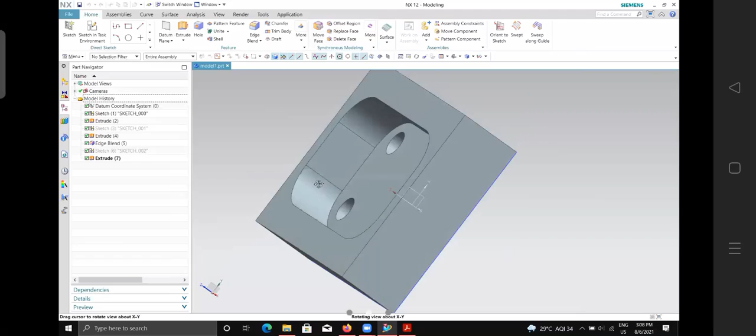So this is basically a rectangle, and I have made a slot onto it. Removed some material, and I placed 4 holes inside it.

The dimensions for this, if you want to see, I have given as 200 and 150. 200 is the length of the rectangle, 150 is the width. Then for the slot, I have given it as 100 and 175. The length is 175 and the width is 100.

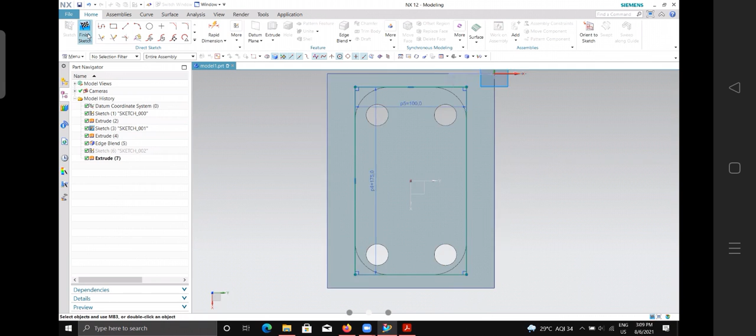Then for the holes, all holes have a diameter of 20. So these are the dimensions.

If you are able to, you can create it afterwards, or if you want, you can create it with me and do it now. Okay sir, now I will. So if you are able to create, you can create it now and we can do it side by side. Okay, now I will do it. I am doing now.

Are you creating it now? Yes sir. What? I didn't hear you. Yes sir, I am creating now. Okay, fine.

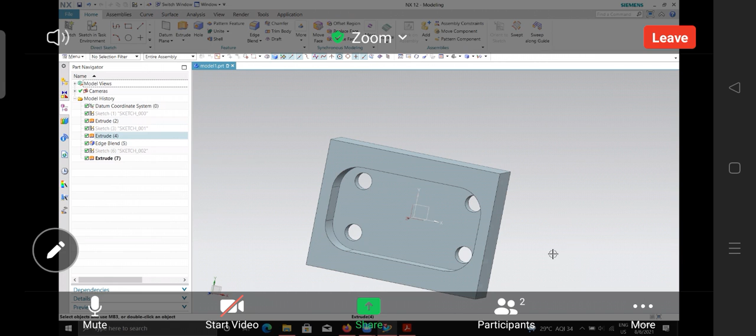So first start with the rectangle. Then the extrude height for this rectangle I have given as 50, 50 height. And inside I have cut the material to 35. And the holes have been cut through.

So today we will be starting with the first operation called face milling. So we'll see how we can do certain operations using face milling.

So tell me when you have finished completing the model. Okay, oh okay sir.

Okay, so next what we'll do is we'll come into the file tab, then select new, and select general set, and click OK.

Now you need to save the model also. Just save the model before doing this. Okay, okay.

Now once we come into here, my main aim is to create the desired model into this shape, and we need to see the manufacturing process for this.

So first, what I will do is I need to remove the material on top, then remove the material inside the slot, and then remove the material inside these 4 holes. So that is the main thing. So we will be starting with a block of rectangle, then we will be milling it to the required form. That is our aim.

Are you able to hear me? Yes sir, I'm hearing.

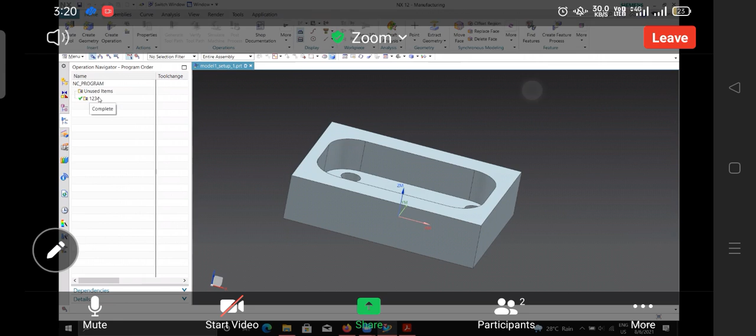Okay, now first, what I will do is, if you want, you can change the name of the program order. So this will be the default name that will come in. If you want to change, you can just select it, right click it, and rename it if you want.

I just give some random name. Then after that, the first thing we need to do is define the workpiece. Okay, just hold, I'll just come. One thing to note.

So first thing what we'll do is I'll go into the geometry view. Double click on this MCS mill and bring it to the top here. So you know the height of this particular model, right? That is 50. Yes sir.

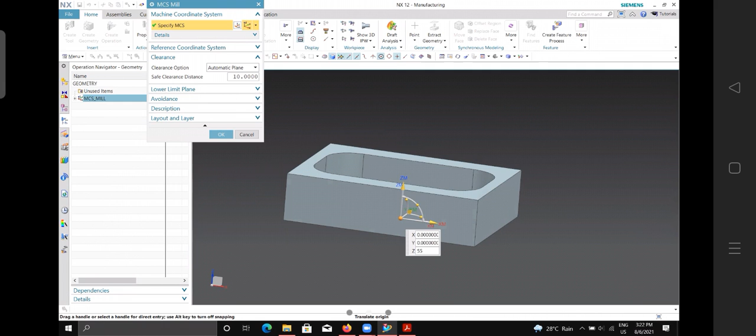I had given it as 50, so I'll give the Z direction as 55. I'm not giving 50 itself. That is because I want an extra bit of material on the top. So I'll give 55 now.

Click OK. Now you will see that there is a bit of distance here, right? Yes sir, of 5 mm extra distance. So we'll compensate that. So next what we'll do is we'll expand this MCS mill.

Double click on the workpiece, and specify the part and blank. So click on specify part, select the part. And we need to specify the blank.

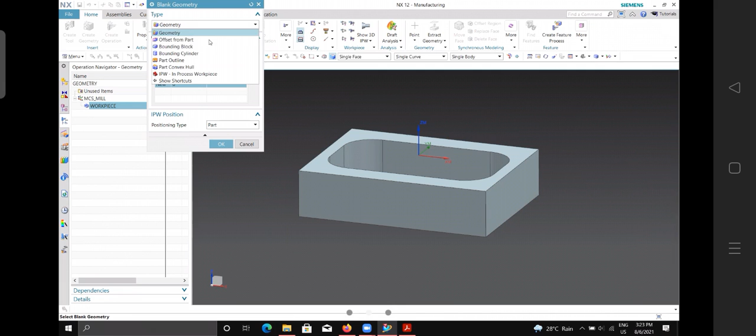Select the blank, and the blank that I'm going to give is, since it is in the shape of a rectangle, I'll be selecting bounding block. Okay, so select bounding block.

And also one thing to note is, since I have given the MCS mill an extra distance or clearance of 5 mm, I'm going to give in the positive Z direction an extra stock of 5 mm. Okay, so give it here.

That is in the positive Z direction. I can see in all directions X, Y, Z. Yeah, I can see here in the limits. You need to give it in the positive Z direction, so it will come to the base of this coordinate system.

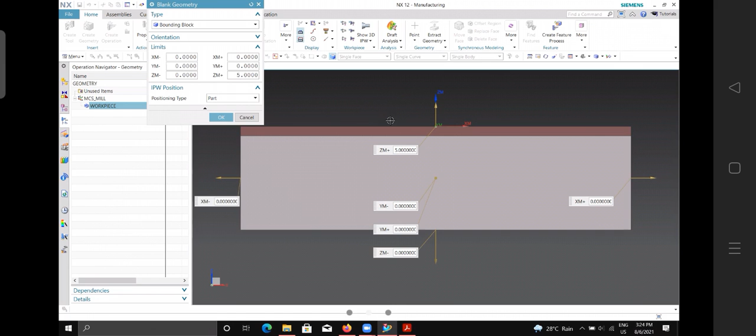So just give the value 5. Then click OK. Now the blank has been defined.

Now, since we do not have any check geometry, no need to define that. Then I'll just change the material of the workpiece. I'll change that to, let's say, aluminium. Then click OK. Now the workpiece has been defined.

Now the next thing we need to do is define the tools, or create the tools. So I'll be creating, let's say, 2 types of tools. Click on create tool.

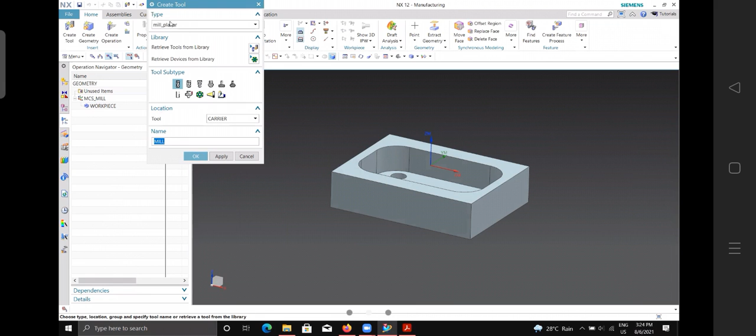The type, we'll leave it as mill planar. Select the tool subtype. The tools we'll be using here will be the end mill type. Because why I'm using end mill is its end is a flat edge. Yes, flat end.

So here we do not have any fillets. Fillets will be on the sides. So in that case, if we had any fillets on the ground or something like that on the sides here, we should have gone for a ball mill or something like that. But since we have pointed corners or edges, no need to go for that. We can select this mill, end mill.

Select that, and the tool location will be in pocket one. Select pocket one. Now give the name. I'll give it as end mill underscore.

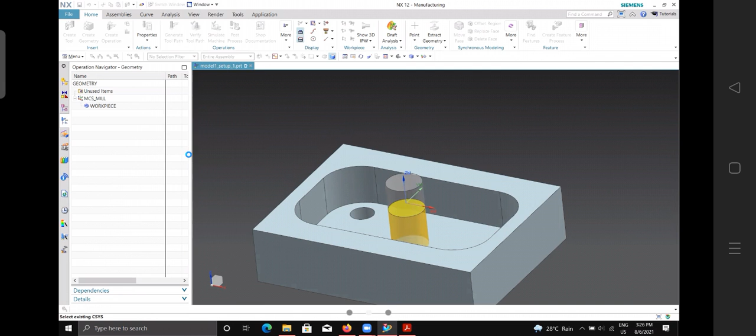It's a diameter of, since we are going for face milling, we need to mill the top face here. So for that instance, I am going for the diameter of 30. So D30. Click OK. Now you will see the tool.

Now we require a larger tool here because we are going to face the top one. We are going for face milling of the top face. So that is why, in order to remove a large amount of material, I am going to give a larger tool. So here I am only concerned with the diameter. No need to give any other or change any other values.

You can see the material of the tool is HSS, high speed steel. If you want, you can change the material also here. From here, you can go for carbide, carbide coated, or HSS steel, anything like that. Now the only thing to note is the hardness value should be greater than the workpiece. That is why I selected aluminium. High speed steel has a much higher hardness value than aluminium. That is why I selected HSS as my tool and aluminium as my workpiece.

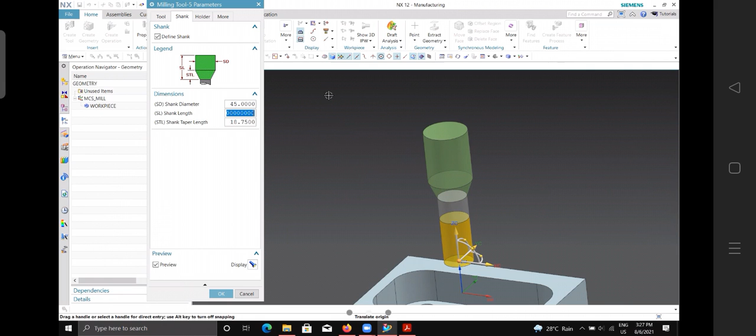Next, we need to provide the shank and holder. So select shank, define the shank. Then I'll provide the holder. Let me just adjust the shank length. 5. And the holder.

Now, if you know the values here, you can give the values. Since I do not know the values, I will be retrieving a holder from the library. So select library, select retrieve holder from library. Select what type of class selection we are going for. We are going for a milling drilling holder. Select that, click OK, then click OK again, and you will get the library.

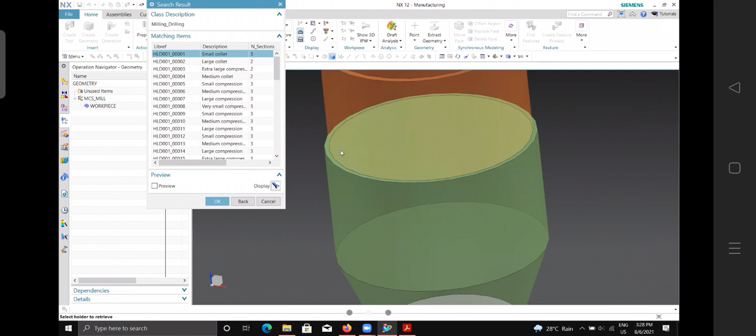Select any type, just check. So we check a smaller one, if you select a smaller collet, you will see that it is not correctly fitting with it. If you select a larger collet, you will see this correctly fits with the shank. So you can select that. So we'll select that.

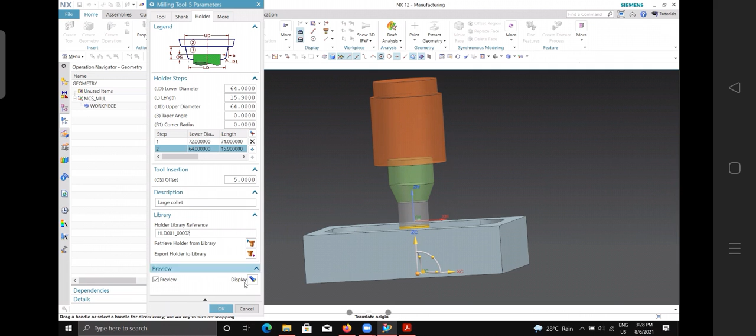I might as well give an offset of, let's say, 5. So the shank will be inside the holder, and click OK. So these are the required things we need to give. Click OK. Now the tool has been defined.

Now we will go for the first operation. So come into create operation. Now we are going for the type called mill planar. In the other case, in yesterday's class, I went for the mill contour type. That is for another operation.

So here, since we are dealing with planar surfaces, we'll be going with planar mill. Select mill planar as your type, and we will see the first operation, that is called floor and wall. There are different operations here: floor and wall with IPW, face milling with boundaries, face milling manual, like that. We'll go through all this, but we'll be discussing the important ones.

So first I'll be selecting floor and wall. Floor and walls are the most easiest type of cutting operations, in which you need to show the floors that you are going to cut, the basement or the planar part that you are going to cut. So select that. Start with the first operation, floor and wall.

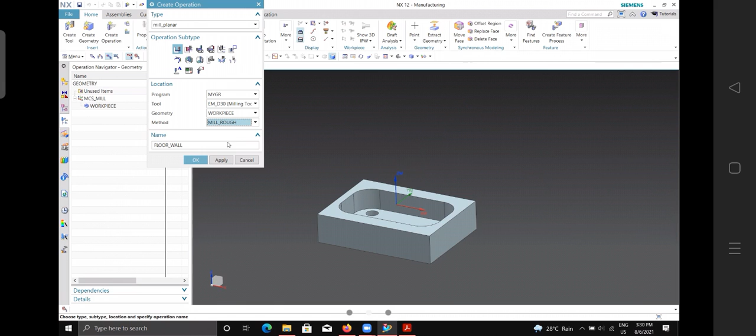Then select the program. Program has already been defined. Then the tool, we need to select the tool. Currently it's given as none. Select our tool. We need to select the geometry. Geometry is not MCS mill, it is the workpiece. So select workpiece and the method. Select the method as rough. So select mill rough. Now click OK.

Now our part has already been defined. If you click on this display, it will show you that the part is already defined. Now the main thing we need to define here is the cut area floor. This is the main thing to define. We do not have a check body since it is not clamped onto any bench vise or any type of clamping fixture, so no need to give that check body.

We need to define the cut area floor. The wall geometry is not needed in this case, but in the later cases we require it. So in this particular circumstance, we will require the cut area floor. The cut area floor shows the area or the plane up to which we need to cut. So specify the cut area floor. Click on this cut area floor.

Click on the symbol to specify the cut area floor. Click on that and select the face. That is this face; up to this face we need to cut. So select that face and click OK. Now that face has been selected. Let's see. You click on this, it will show you the cut area floor. So this is the cut area floor. Clear up to this?

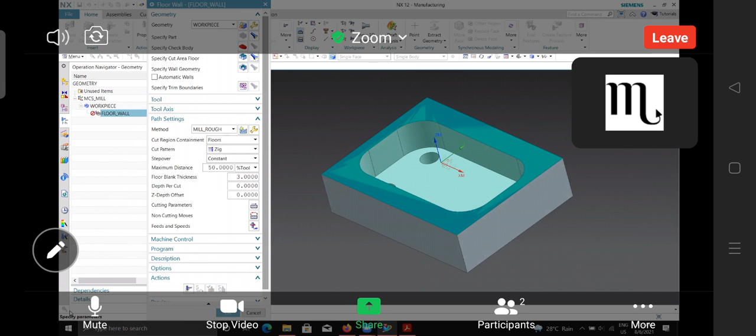Once again, I will share my screen. Hello. Hello.

It is the workpiece, so we have selected the cut area. Could you zoom in to the operations there? First, you need to define the part. Specify the part first. The part has not been defined. Did you define it with the other one? Sorry, sir. Okay, now it is defined, I think. One thing, just close this operation tab. Close it and then again open create operation. Planar, floor and wall. Okay, and click OK.

It's not showing that the workpiece is defined for some reason. Could you close this and let me check the geometry view? Could you double click on the workpiece option there? Now the part and blank are not defined. Initially I defined it. You need to define the blank also. Bounding block, and give thickness. Okay, then select. Yeah, that is all fine.

Okay, now the part is defined. When it is defined, it will show that particular torch symbol, so it is already defined. Now select that face and click OK. So I was telling you up to that, right? Yes, sir. I selected the whole face; this pocket is also selected. What? Only the top face selected, or the pocket also selected? Only the top face is selected.

Now if you want to see the top face, just click on that torch symbol. Can you see? This one, on the specify cut floor option. Just click on it and you will see. This is the floor area that it's going to cut. Clear? Yes, sir.

Now, after defining that, come to the bottom settings here. You will see path settings. The method is already defined, that is mill rough. Now we need to see the cut region containment, cut pattern, step over. If you place your mouse over it, you will see the cut region containment. That is the floor, so it is contained to the floors. You can also select walls, and it will move towards the walls if there are any walls. But in our case there are no walls outside here, only the floor. So just select the floor.

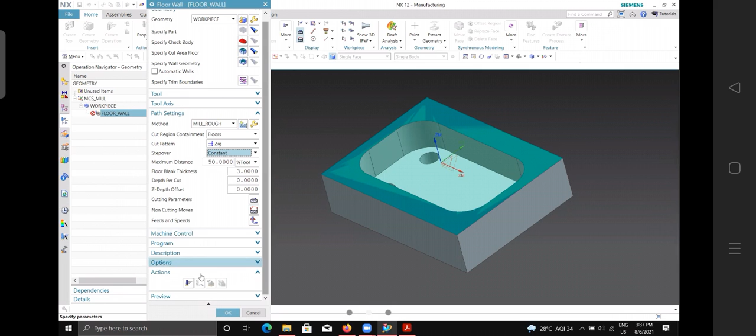No need to give walls. Then you can see the cut pattern. I'll come to cut pattern once we have generated it. Then there is one more thing called step over, which we will see when I generate the cut pattern. I'm not going to change any of the other options here, just going to generate it. At the bottom part here you see actions, and there you click on the generate button. This button.

And if you click on that, you will see the cut pattern. So can you see? Yes, sir. This is the cut pattern you can see. So the cut pattern signifies different colors, right? Yes, sir. Here you can see the red color, the blue color, the yellow color, like that. Yes. Now, in order to understand what these colors signify, I'll tell you each one.

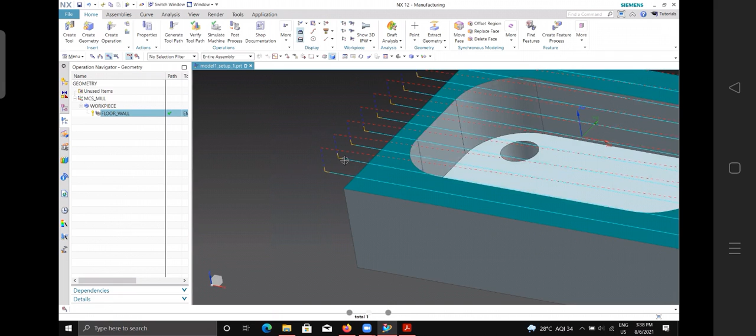So the thing that you see here, that is the cyan color lines, or the light blue color lines, are the cutting movement. Okay. So the cutting movement of the tool is denoted by this cyan color. And the yellow color is denoting the engaging and disengaging.

So it will be moving to the zero position, then moving towards the cutting move. So it is not effectively the engaging or disengagement, but it will come to an initial position, then move into the cutting move. After that, it will be coming back to this position, that is at the end. You can see at the end. So at the end, it will be coming back here, and then again moving axially, and moving to the next direction.

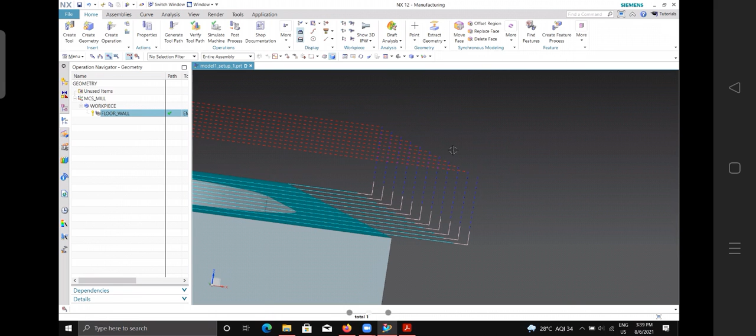So this blue color line is called the engagement. This blue dotted line is called the engagement line, and the red color line is called the disengagement line. So that is how we define this. Are you clear? Okay, sir. So the cyan color line is the cutting movement, and the yellow color is basically for positioning the tool. Blue color line is for engagement, and red color line is for disengagement.

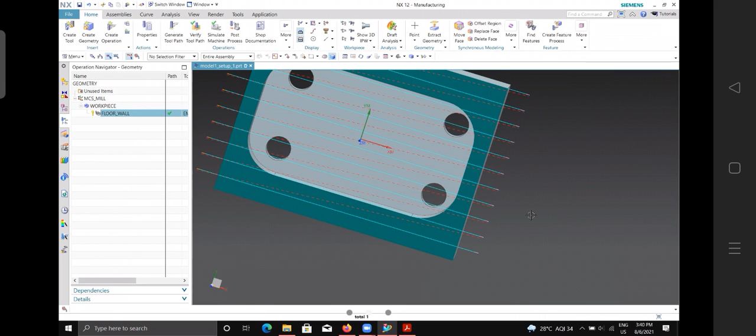So you will see the pattern here. So if you see how it cuts, the tool will be starting from here. So it will come down axially and cut it from here to here. Then it will move up axially. And you can see through the dotted line, it will be moving to the second line. Then again doing the same operation and repeating it again and again. Are you clear up to this?

Yes, sir. So this is how the cutting pattern works. Now this type of cutting pattern is called the zig cutting pattern. Are you clear? Yes, sir. This is called the zig cutting pattern. Now we'll be discussing different types of cutting pattern, but when it comes to zig, this is the cutting pattern that it follows.

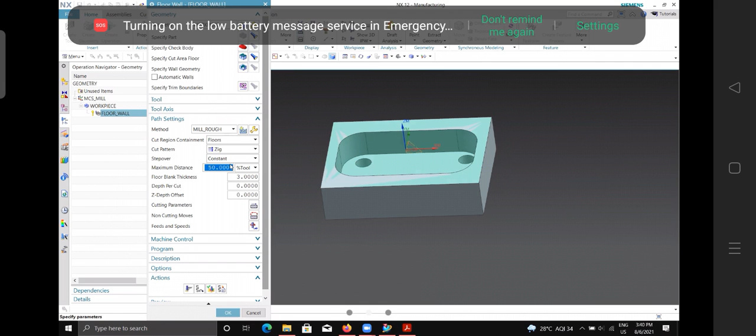So that 50% means the basic area that will be engaged with the part. So when it is cutting the part, it will be engaging 50% of the tool. That is what is meant by maximum distance. Now let's say I increase it to 75% and again generate this. We'll see that the number of cutting patterns will be reduced.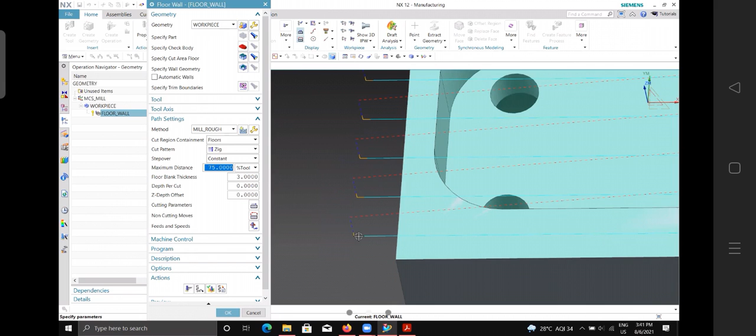So what step over essentially means is the distance between one cutting line or cutting move to the other cutting move. So the step over distance is this horizontal distance. Can you see? Yes, sir. So this is the distance of step over. So if you are increasing the step over, let's say to 100, and again generating this, you will see that the number of cutting lines have been reduced, right? Yes, sir.

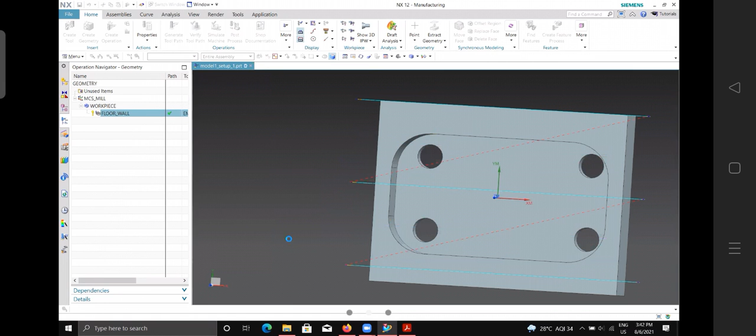Clear? Yes, sir. Okay. And if I increase it to 150 or let's say 250, it will reduce it again. So I can see only 3 cutting lines. Now what we'll do is we'll just verify this to see how it cuts. So at the bottom here you can click on verify. In actions, next to generate, you will see verify. Click on verify. Then click on 3D dynamic.

Then if you want to see the tool displaying the dotted lines, you can select that. You can select the tool display as wireframe like this. You can use it as a point, so it will show it as a point. You can use it as an axis, or the normal tool or the assembly.

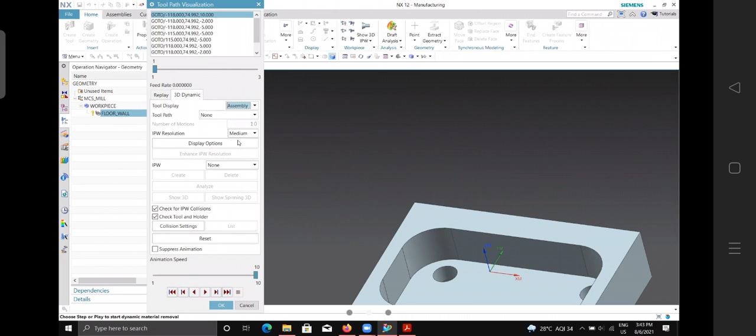Now let's use it as a tool itself, and if you want to see the tool path, the cutting tool path, you can turn it on. Just click on all and it will turn it on. Then, okay. Now we'll just see the value here.

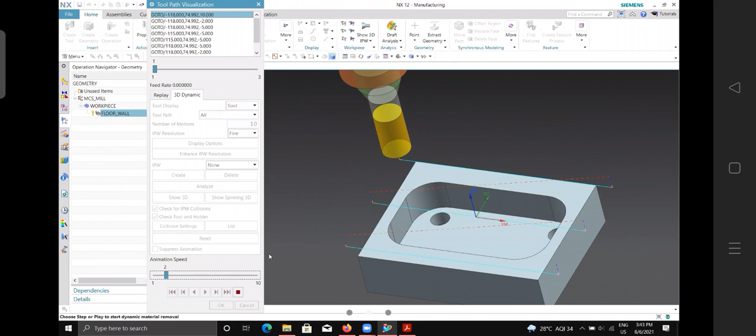Just reduce the animation speed, then click on play. Now we'll see how it is cutting this. So can you see? Yes, sir. So the first cutting pattern has been completed. Now the tool will move along this direction, that is the red dotted line, and it will cut from here to here. Then again it will move up, then cut to the end. Okay.

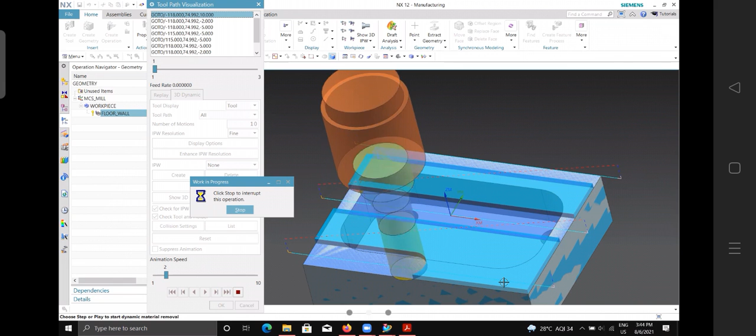So this is the process. So can you say what is the problem here? Step over is more, sir, at 250%. Yeah, since step over is very large, the number of cutting patterns is not compensating to remove the extra material that is being left behind. You can see here. Yes, sir. So this amount of material is being left behind, right? Yes. These parts.

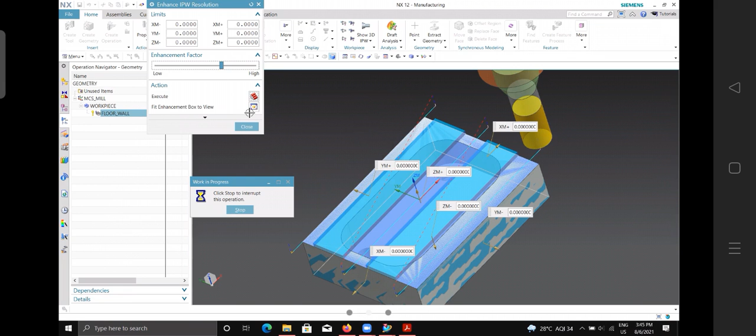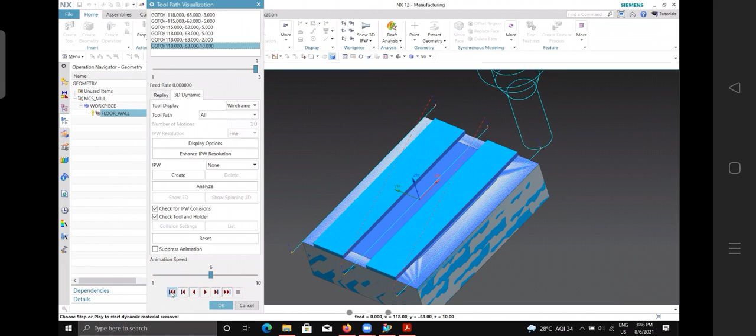And just reduce the transparency and everything. Okay, so basically you can see how it is being done. So this has been left over. So what can we do to compensate it? We need to reduce the distance, right? Yes, sir.

So I'll reduce the maximum distance here from 250 to, let's say, 50 is enough. Because when you are giving 50, it will automatically compensate the total face. So again click on verify, then again do it. Now I am going to change the tool display to either point or wireframe, because if you change it to wireframe or point, the system processing will be much smoother. Otherwise it will take some time for the system to select all this. That's why.

So change the tool display to wireframe and click play. Now you will see how it is cutting it. So now it is properly cutting it, right? So this is what is meant by the step over value. So you can adjust it for yourself and see what is the difference. Okay, sir. Now currently the step over is given as constant.

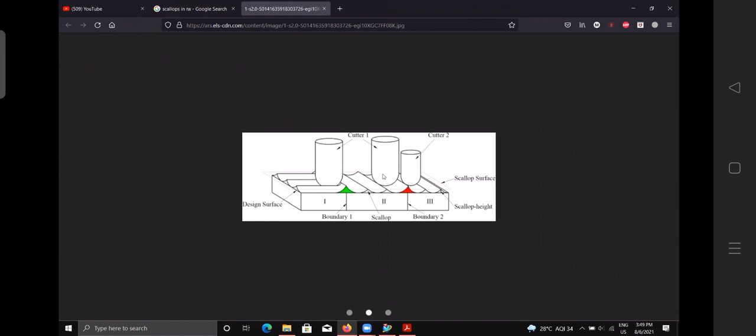So this is the image. Here you can see this is a flat surface, and when the tool is cutting it like this, you will see that the scallop is created like this, right? It's like a wave. Okay, sir. So the scallop measurement is based on the amount of surface that you cut, how fine you are finishing the material. So if you increase the scallop height, it will bring certain indentations like this. We don't want this; we want a fine surface, not a surface like this. So in order to avoid that, we need to reduce the scallop height.

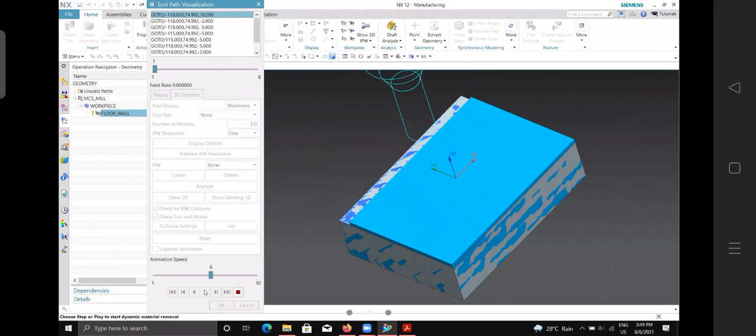So here the scallop height is given as 0.01. That is very less. Now if we increase it to, let's say, 5, we'll generate this and see if we see any scallops. Now in this case you won't see any scallop. That is because we are using an end mill. Now if I increase the scallop height to, let's say, 25, I'll just change the tool. You can change the tool whenever you want. So here we are using an end mill, right?

Yes. So if you want to change the tool, you have an option called the tool tab here after geometry. If you expand the tool tab, you will see the tool given here. If you want to edit the same tool, you can click on edit, come here and change the tool parameters if you want. So this is basically an end mill, so it won't give you any different types of scallops. In order to give a scallop, you need to increase the lower radius.

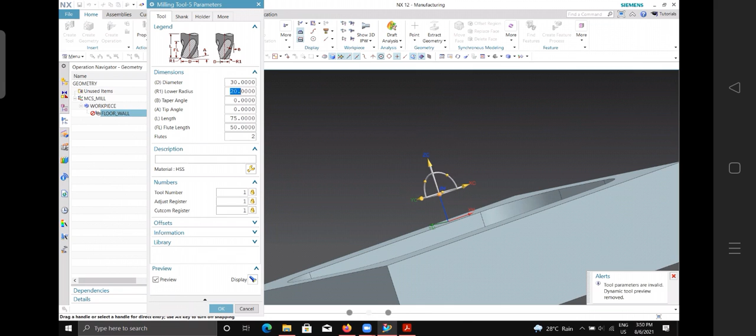Say I'll increase the lower radius to 20, 10. Okay, now you can see it will have a curvature like this of 50. So we'll change it to this. And the scallop height is given as 25. I'll again increase it to, let's say, 50, and we'll see if there is any difference. And press on play, and we'll see the difference.

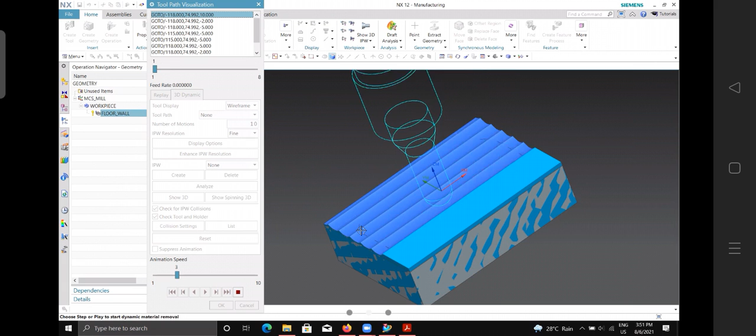So can you see the difference here? Yes, sir. So this is the surface that you will get. And these kinds of structures are called scallops, like a waveform, right? So this is something that you will get when you are using a ball mill, like this. But when you are using an end mill, you won't get it like that. That is why we prefer end mills when milling planar surfaces. Okay, sir.

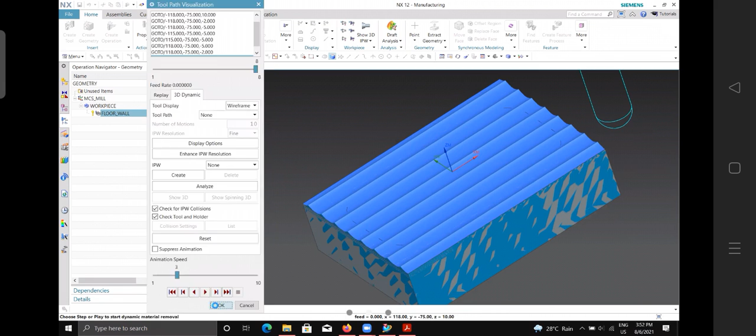So I am going to again change the tool. So come into the tool tab again. The tool is already defined here. Just click on this for edit and display. And I'll again reduce the lower radius to 0. Okay, so that is known as scallop. Then percentage of tool flatness is the same thing as that of the constant size.

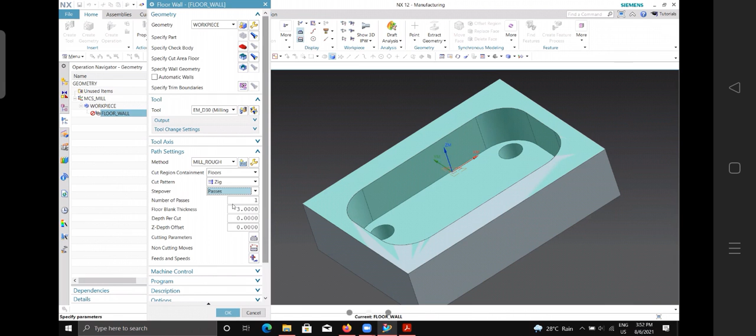Then the passes. Passes is something that you can definitely define here. Currently the passes is given as 1. Now, if you just generate this or verify this, you will see that the cutting will be like this because it only has a single pass. And if you increase the pass to, let's say, 4 and generate it, you will get the 4 passes. So I can define it this way also.

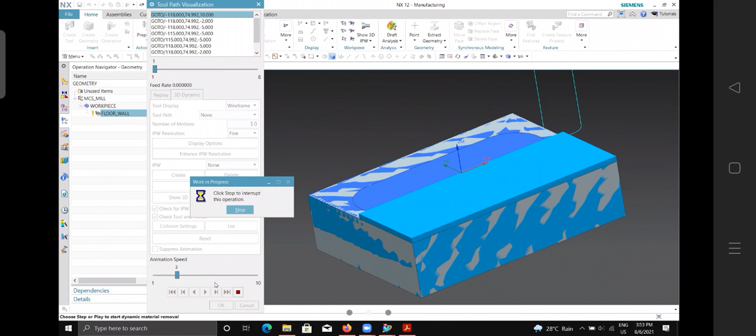Now, if you want to increase it to, let's say, 10, or I would say the ideal one will be 8. 8 is the ideal one so that it cuts all the material. Okay, sir.

So these are the different ways in which you can define it. So we can give passes. Then variable average is also something that we can give, but you need to know the maximum and minimum distance in order to give that. And exact is also the same thing as that of the constant and percentage of tool flatness. You can give any of the parameters if you know this. Otherwise, go for constant or passes or tool flatness.

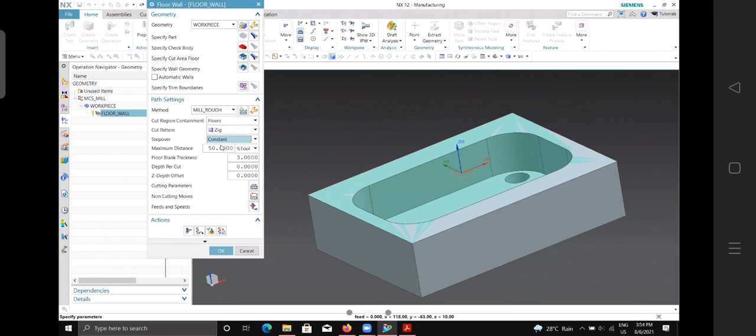Now, we'll come to the cut pattern. The cut pattern we were using here was the zig pattern. From the name itself, you know. So, it is starting from one place, coming to the other, then moving on to the same position, then again cutting, moving to the same position, again cutting. So, that is called zig. Now there is one more type of cutting pattern called zigzag.

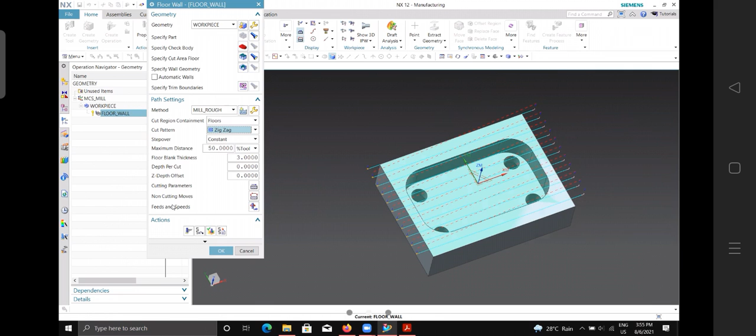So what zigzag does is basically goes around and around. You're familiar with the zigzag shape, right? Yeah. Like a Z. So that is the way in which it cuts. So we select zigzag and click on generate. You will get a pattern like this. You see, this is the zigzag pattern. I'll just generate the cutting pattern. We'll see.

So what this effectively does is that it reduces the tool engaging and disengaging, so it can cut in a single pass. Clear? Okay, sir. So when you're creating a workpiece, you need to cut it efficiently, right? Yes, sir. So when you're using the zig pattern, it is not entirely efficient because the tool is always engaging and disengaging, right? Yes, sir. So by doing that, the machining time will be increased.

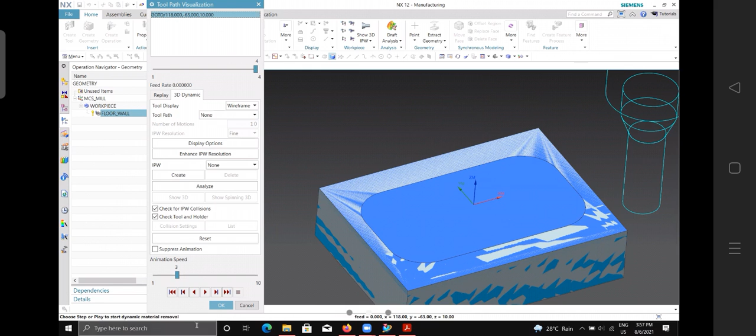But when you are using a zigzag or any other type of cutting pattern, it will cut it in a single pass. The only thing is that the depth should be considered here. When you are cutting it to a higher depth, there might be some chances that the tool might break off because of that shearing stress. So in order to avoid that, you need to view the depth of cut, in which depth I can cut. If you are clear with those parameters, then you can cut it using the zigzag pattern.

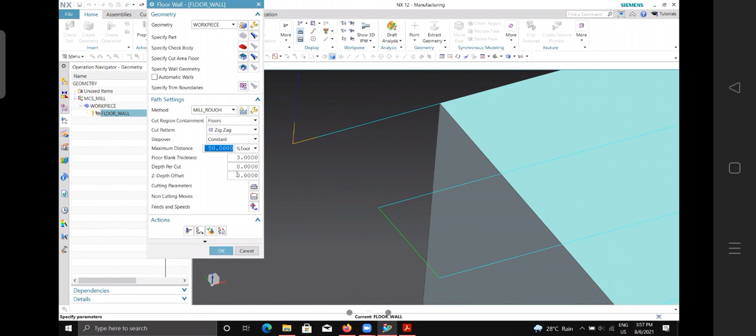Now, how I know that it is cutting in a single pass is that if you look closely here, it is having a single cut pattern, right? Yes, sir. And it is not having any levels. In the other case also it doesn't have any levels. It was just cutting as it goes, right? Right, sir. That is because we have not provided any depth of cut. Now, if you are providing a depth of cut, it will cut it accordingly. We will come to that. But zigzag, you understand the cut pattern zigzag, right? Yes, sir.

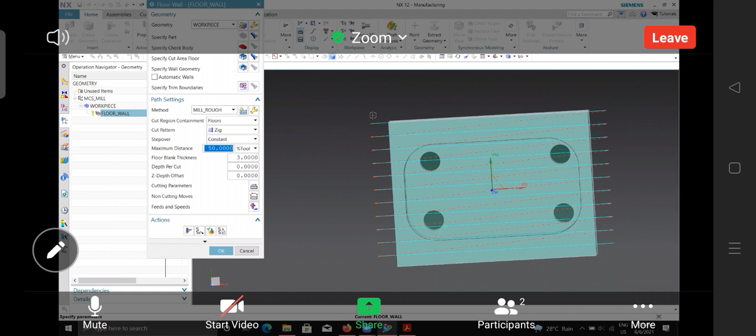Okay. Now I'll change it to, let's say, zig with contour, and we'll generate this again. So zig with contour is a different thing. It's sort of similar to zig, but the only thing it is taking into consideration is that the contour is confined. When you were considering zig only and generated it, the cutting pattern was going outside the workpiece, right? So when you are cutting with zig with contour, it is confined to the rectangle or the workpiece here. That is the advantage of this.

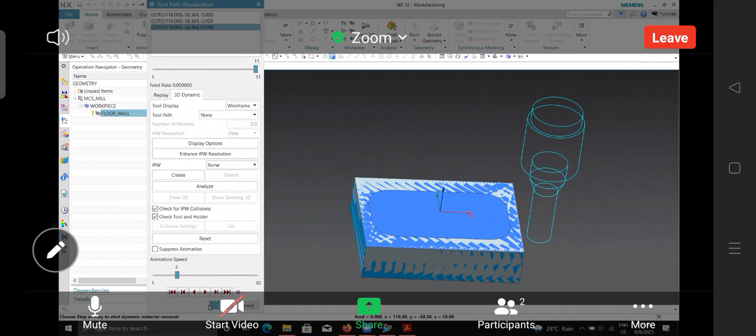Now if you verify this type of cutting, we'll see. So you can see how it is cutting it. Now this has a lot of engagement and disengagement, right? Yes, sir. It is going up and down like that, similar to zig. Okay, sir. So this is also not an efficient method.

Now next we'll go into the other cut pattern. That is the first option here, which is called follow part. So select follow part, click on generate, and this is the follow part method. So the tool will be engaging from the middle portion and it will be cutting towards the outside. Okay, so the tool will be engaging from here, moving towards this direction, starting from the center. So it will cut in this direction. Can you see? From here, like that.

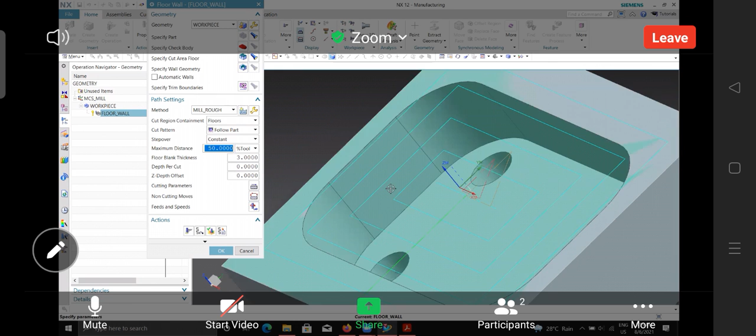Now we'll see the cut pattern. On verify, on play. You can see. So it will start cutting around the sides and will come to the center and again disengage. So this is also one efficient way to cut, since it is cutting with a single pass. So this is the follow part method. Clear with this follow part? Yes, sir.

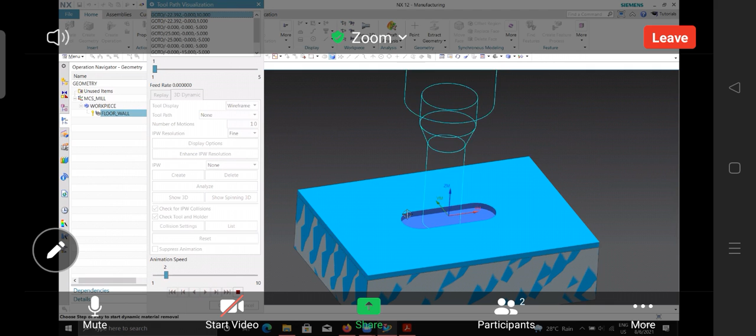Now another cut pattern is follow periphery. If we select that, it is kind of the same as the follow part method. You will not find a difference here, but the only thing is that it will be starting from the center instead of starting from the end. So it will start from the center and go towards the boundaries. That is how it cuts. So it is relatively opposite to the follow part option. Follow part, the tool path is also the same, right?

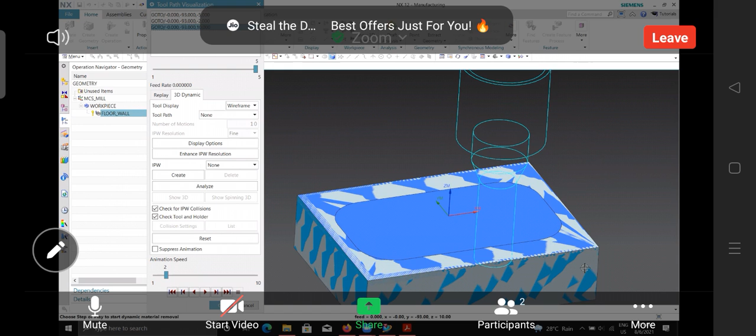Yeah, the tool path is same, but the only thing is that with follow part, it will be starting from the boundary and going towards the center. But in the case of follow periphery, it will be cutting from the center to the boundaries. That is the only difference. The movement of the tool will be entirely opposite.

And there is one more type of cutting pattern that is called profile. Now, if you select profile and generate this, again, in this particular case, I cannot do the profile one. I'll show you in another one. Okay, sir. Because profile and trochoidal are a special type of cutting.

Now, if you go for trochoidal, the difference I'll show you. The trochoidal pattern is basically used for cutting cavities, meaning inside a particular workpiece. The main example is the slot. If you want to cut the slot, you can use this particular type of cutting pattern. Now, how it cuts, I'll show you.

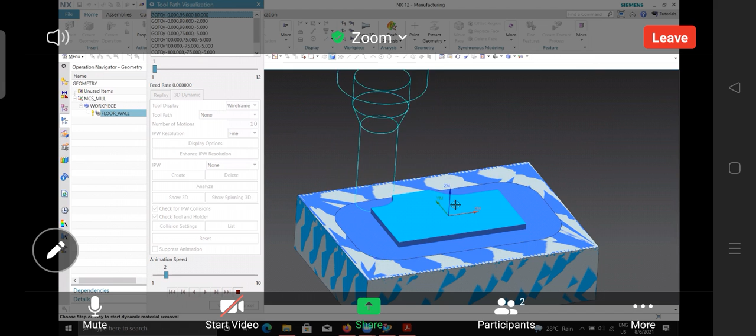So it will cut from the ends, like in the case of periphery, but its movements will be quite different. But in this case, you won't find the difference between trochoidal and follow periphery because there is a special case involved. The pattern is not quite shown here. So in another case, I'll show you the trochoidal pattern.

So these are the cutting patterns available. You can use any type, but the efficient methods are follow part, follow periphery, trochoidal, and zigzag. So I'll go for zigzag for now. And you need to define this one, that is the floor blank thickness.

So here there are three options: floor blank thickness, depth per cut, and depth offset. The floor blank thickness is the thickness that I have provided on this particular job piece. I had already given a thickness of 5 mm, so that is the distance you should write here for the floor blank, because we want to reduce it to a distance of 5, to get the original face. That is why I am giving the floor blank thickness as 5.

Then you need to provide the depth of cut, or depth per cut. When we are generating this, you will only see a single level for cutting the whole workpiece. Now if you give the depth of cut as 1 and click generate, you will see almost 1, 2, 3, 4, 5 levels. For 5, it will be cutting a single mm through each pass, or each level. So understand what is depth per cut.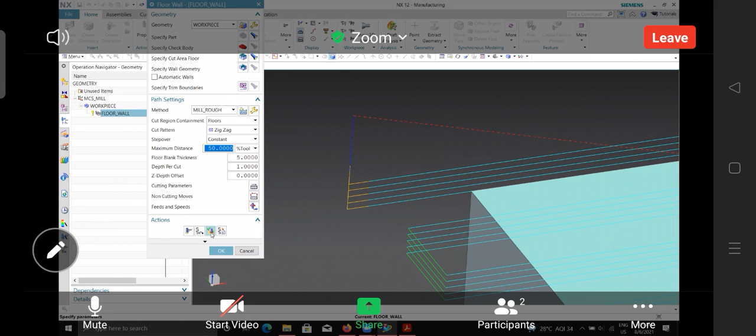Now I'll just verify this and show it to you. So it will be cutting the whole material 5 times. Let me play this so you can see. It will remove the 1 mm layer first. Once it has removed the top layer, it will again start from the end and remove the second layer. It will do this for 5 times, repeating it 5 times.

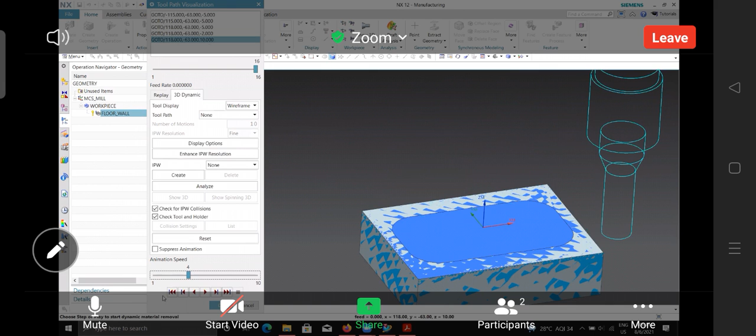This is how you can maintain the life of the tool and also reduce the wear of the tool. If you are cutting it in a single blow, there are chances for the tool to break off or rupture. That is why we are giving the depth of cut.

And the Z-depth offset, currently we do not require this one, so no need to give it for now. So these are the operations involved in this.

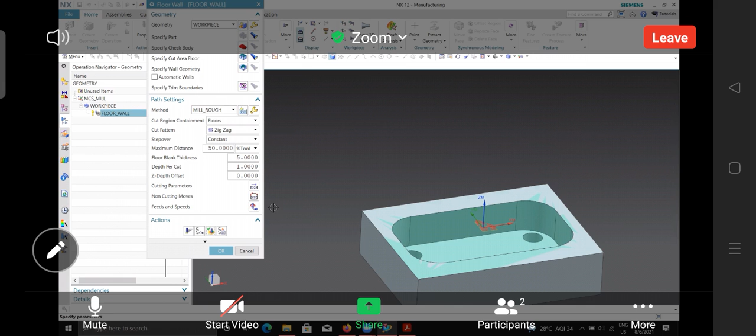Now one more thing we can see in the other options here is cutting parameters, non-cutting moves, and feed and speed. I'll tell you about feed and speed. If you select feed and speed, you are basically defining the feed of the tool. We can define the surface speed, feed per tooth, and spindle speed. I'm going to give the spindle speed as up to 3000 RPM. Once you give the speed, it will automatically calculate the surface speed and feed per tooth. So either you give the surface speed, feed per tooth, or spindle speed, and when you click on the symbol, it will automatically calculate the other values based on the given value. That is how you can give it, that is feed and speed.

Then next thing is the cutting parameters. For feed and speed, we entered only the spindle speed in RPM. Once you enter the spindle speed, you can click on the symbol to calculate the surface speed and feed per tooth automatically, the software will calculate it, no need to give it.

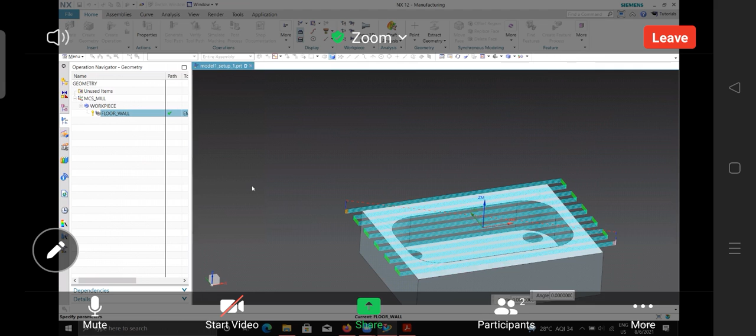After that you will see the cutting parameters. If you click on this, it will show different options: strategy, stock, corners, connections, containment, and more. These are the different options you will see, but in our case I will not be covering all of them because we'll be coming into other operations and utilize all these options later. Cutting parameters is right about here, next across to cutting parameters, you will see this symbol, just click on that and it will open up the cutting parameters. What cutting parameters does is provide options related to the cutting of the workpiece, different options that you can change in order to cut the object at a particular angle or something like that.

Now when you select cutting parameters, you will see an option called strategy. Under the strategy tab you can define the cut direction. There are two types of cut direction: climb cut, where the tool goes against the workpiece and rotates in the anti-clockwise direction, and conventional cut, where the tool goes against the workpiece and cuts it in the other direction.

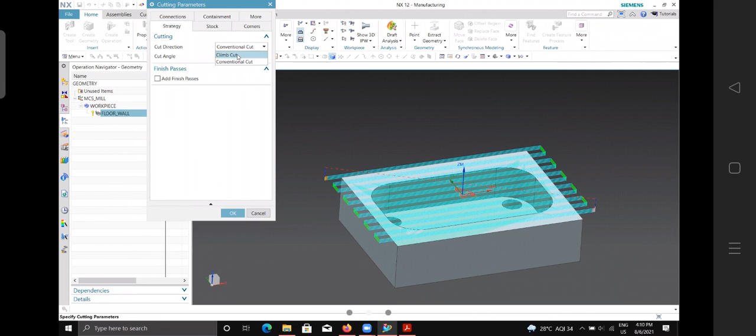Sir, you can cut it in either way if you want. Then there is the cut angle. Cut angle is given currently as automatic. Now if you want to specify a cut angle, you can specify the cut angle.

Let's say the angle is from the x coordinate, that is this coordinate. Now if you want to change the angle to 45 degrees, it will change according to that. The cut angle will change like this, and the tool will come accordingly. So it is the cut angle from the x direction.

So this is the x direction. It will be tilting towards this. Now we'll just see—if you generate it, you can see the cut direction. Can you see how the direction changed?

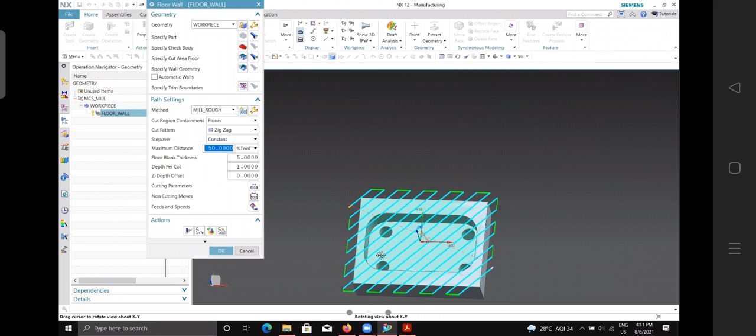If you click on verify, you will see how it cuts. So it will cut the workpiece in this way. Clear? Yes, sir.

So that is what the cutting parameters does. This is just an option inside cutting parameters. We can give it in this form. Now I am going for automatic itself, so it will automatically recognize that.

And there are different other options here. You can give the stock. Stock is for giving the extra material left behind—that is the stock, part stock. That you can give; we'll be coming onto all that in other classes.

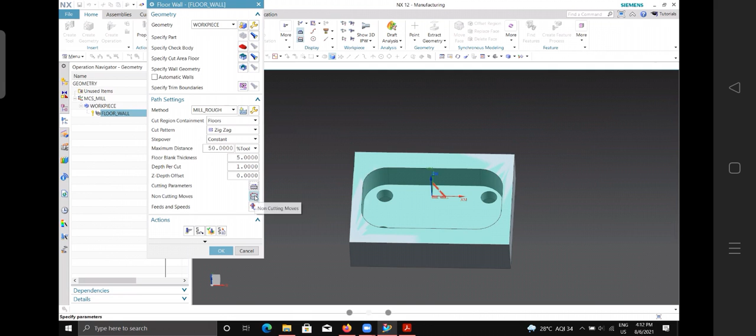So that is about cutting parameters. Then there is the non-cutting moves, that is the non-cutting parameters. You can select that option by clicking here. It's just below the cutting parameters—just click on that.

Now this deals with the engagement and disengagement of the tool—how the tool should engage and how it should disengage. It will give the disengage type, the ramp angle and everything. So how the tool should approach it, either in helical form—you can give the diameter for the helical form, the tool dia, then the ramp angle, how it should approach the workpiece, then the height.

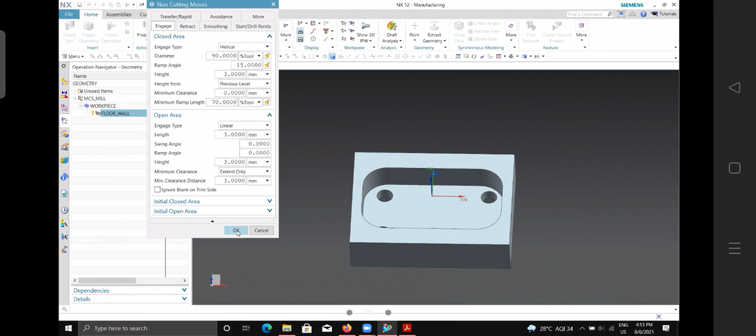The tool cutting direction—all these things can be defined here. And also the same in the case of retracting, then when cutting smooth corners, drilling. So these are the different options, but we'll come to all this—it is not required by us in this case.

So we have generated this. Now you will see this is just the programming for the current operation. I can see the programming here—this is the system language. Click OK, now our first operation has been defined. Floor and wall, clear? Now we need to move on to the second operation, that is cutting the slot inside.

So for that we need to create another tool. First I'll use the same tool for cutting the slot inside here, and after that we will use a smaller tool, an end mill of a smaller size. I'll select the create tool option. The tool location will be pocket 2 and I'll name this EM underscore D12, giving a diameter of 12.

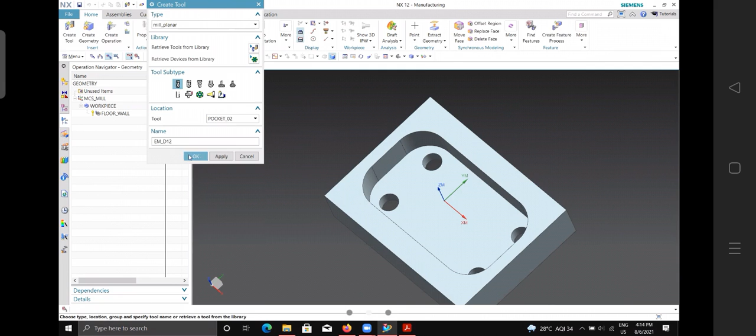This will be the finishing tool, so give its diameter as 12. You can define the shank—I'll give the shank diameter as 25. Length we will reduce to 45, and provide a holder for it from the library. You can retrieve the holder from the library.

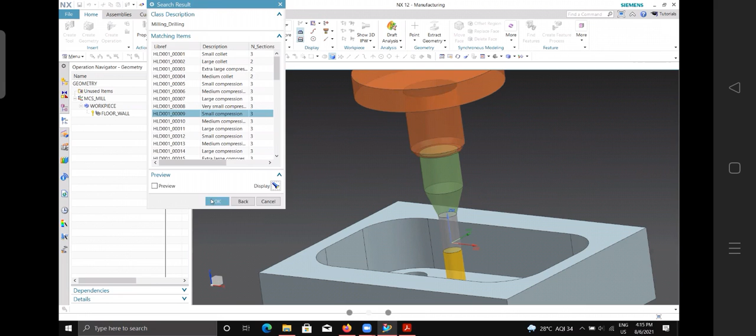Select milling drilling, click OK, and select a smaller holder. This one is quite large—select a smaller one, either this or this one. Okay, this is fine. Now the only thing to make sure is that the flute length is already given, that is 50—that is enough. So just click OK, now that has been defined.

Now click on create operation. You can do the cutting with the same option—floor and wall, so select floor and wall again. Now we will be using the same tool, but we will be doing the roughing process. Click OK. Now instead of showing the top face, here we need to show the cut area floor as the inside part. This is the face that we should select next, for the second.